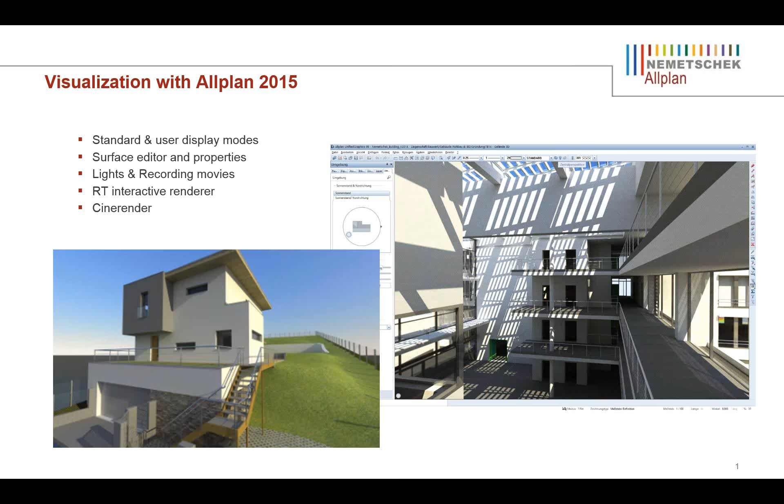Okay, so I'll switch to Allplan now.

So first, I would like to start with the new unified windows. What does this unified working window mean?

It means in the previous version there was a special animation window which shows all the surfaces and animation properties, and a construction mode where the user can draw and so on.

So in 2015 we unified this behavior and introduced a new unified window where all the display could be used using the new display modes.

These display modes you will find in the navigation toolbar, so any window can be switched between these various types. For example, from wireframe to animation, or to different types of display modes.

So there are a couple of standard default display modes which could be used, and then the user can adjust or create a new one as a quicker way to display the model or a scene.

So maybe, as you know, this is the classic wireframe mode, which is mainly used in the floor plan.

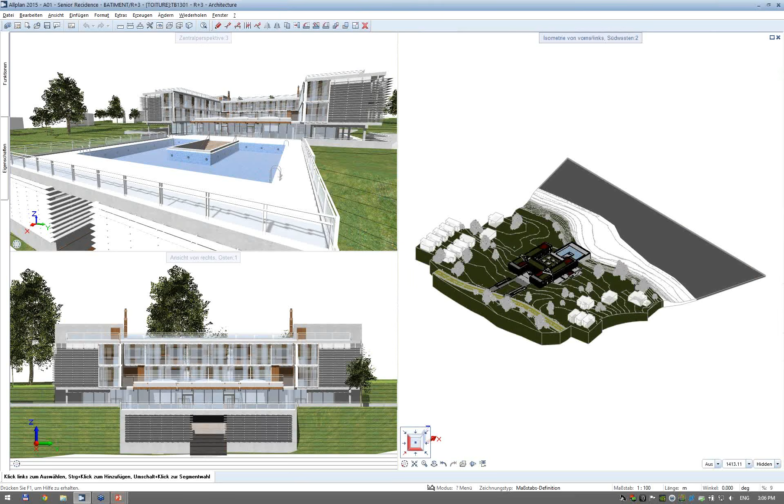I go to a different mode, and then if I want, I can use this pencil to modify this display mode.

For example, I can choose here if I want to show the transparency, or the surfaces, or some other properties.

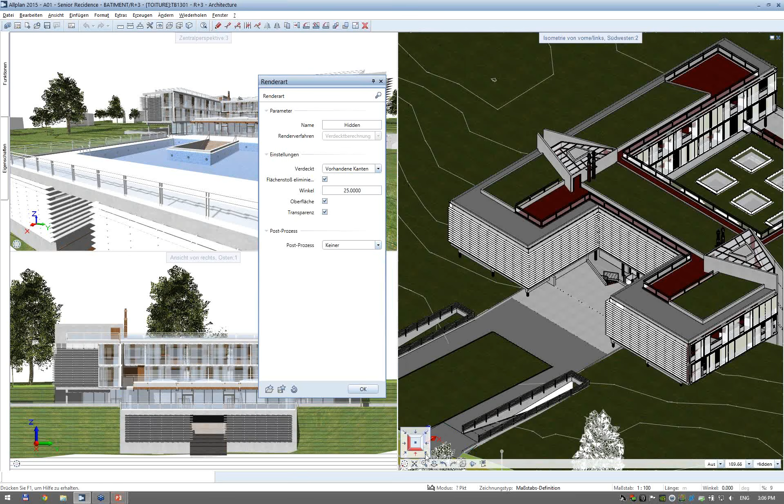For example, I can apply some filter like a sepia effect or black and white to get some kind of appearance of the model.

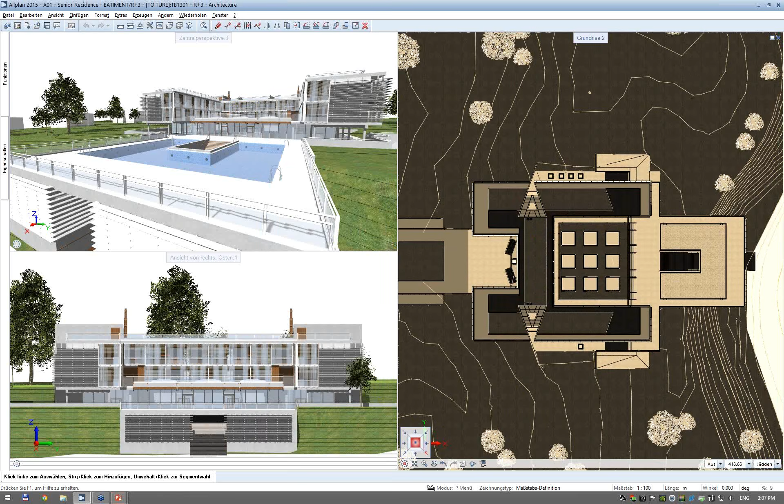To get the hand drawing style of the model, we can use the sketch mode.

And then if you want, you can adjust this mode to get the feeling which you want to achieve.

Again, you can apply the surfaces or use different styles like pencil, pen, marker, and so on. So it depends on your wish how you want to display this data.

If I want, I can display this mode in any window, and the used line type will be used in all windows when the sketch is open.

I can adjust the thickness of the lines. This is a thickness in pixels.

So then I get more smooth details, or more detail if I want.

All these new modes are hardware accelerated, so it's very fast in real time. But of course, it depends on how much data is used.

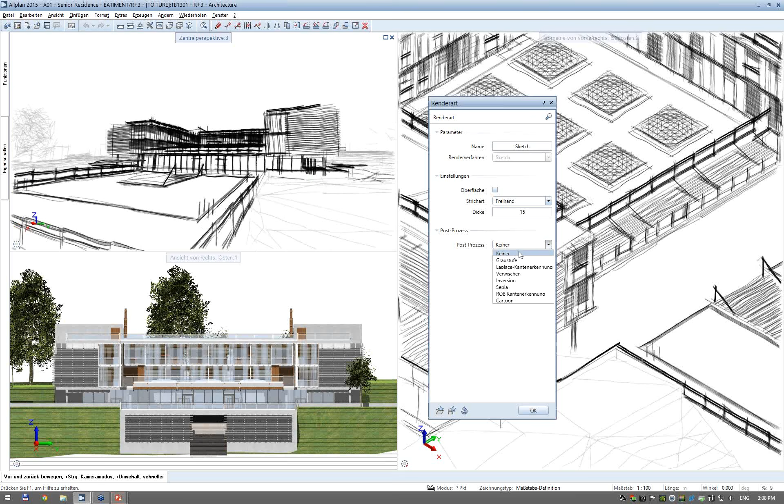If I want, I can also apply any kind of post-process to this. I can show you some different appearances of the sketch mode. For example, I can use the inverted post-process to have a different appearance of the model.

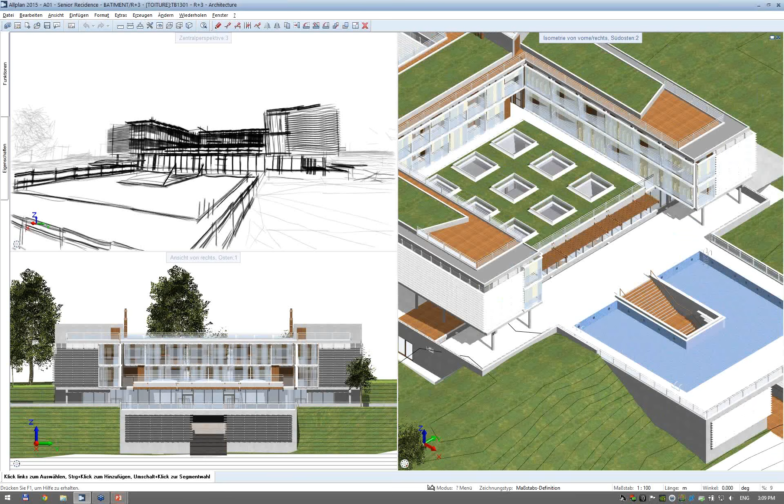Okay, I will go back to animation. If you can see here, with 2015 we introduced a new enhanced animation display mode, which means we can now show in real time the shadows, the real-time reflections on reflective objects, and real-time transparency, which is real transparency, not only a simulation of it. So if you have transparent objects and look through one to another object, they are affected by the color of the transparent objects in front. So this is real transparency, real reflections.

Again, because sometimes users want different settings to show the model, the animation can be adjusted, so you can choose the quality of the animation. For example, Phong is the new animation with all the enhanced settings like reflection, shadows, and everything. If you use Gouraud, this is more or less like the animation in 2014, so it's quicker because the most powerful properties aren't there. So it's quicker, faster, but not as realistic as Phong. But for bigger models, or if you want a simpler appearance of the model, you can use this Gouraud shading.

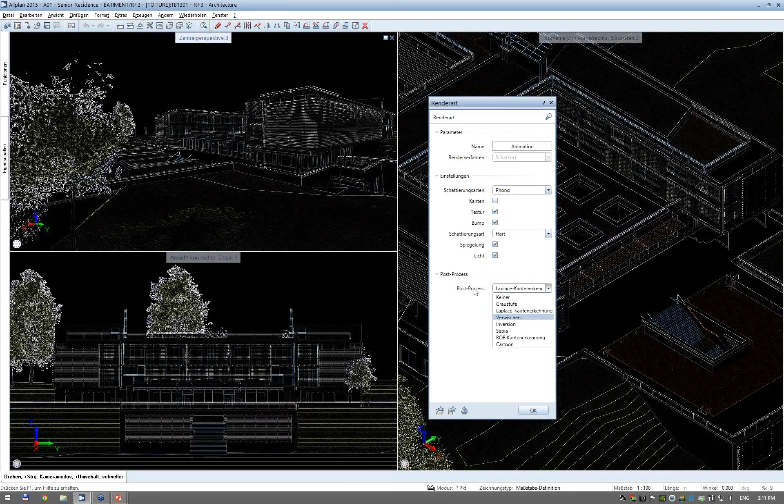Of course, you can turn off the textures, or as I told you, there's not only reflection but also bump, the deformation of surfaces, directly in the animation window. I can switch off the lights if there are any, or turn off the reflections. I can apply any kind of post process to this if I want, some kind of Laplace, or some blurriness, or other effects. There's also a possibility to use soft shadows.

So I prepared the new user-defined display mode. You can see here the shadows are soft, no hard shadows with strict silhouettes. But of course these soft shadows need more processing power. If you want, you can adjust the blurriness of these shadows here for the mode with soft shadows.

And this is, for example, the animation with lower quality. With the bigger model, or if you want less realistic results, it's quicker, faster with the movement, and of course you can combine these kinds of user modes.

I would like to show you how to create them. You can create a new mode very easily, name it, and then simply choose which mode you want to use. For example, sketch in as a marker with this kind of thickness without any post-process. Then it appears here, and I can use it and display the model in it. If you want to delete them, in the user display mode you can find this delete button, so you can automatically delete these user modes.

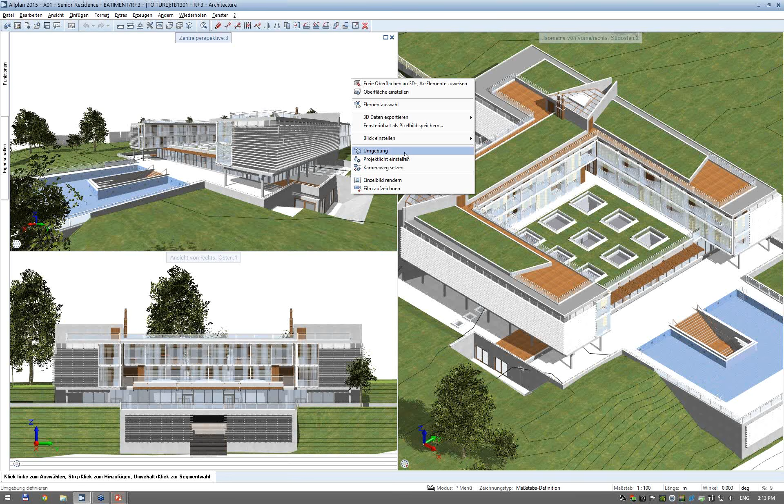I'd like to go back to the animation and show you the appearance of the model using different backgrounds, because what we can see here now is just the white color background. So the newly introduced features are everything connected with the environment of the project.

So maybe I would like to first switch to the physical sky. I will use the full screen mode. So we have the new possibility to locate the project. We can use the map or the location finder, so I can simply type the location or the street and locate the project automatically, or use the map to locate the project.

We also introduced the new possibility to locate the project with more precision, and we can use time zones if we're working on an international project. So working in Germany, for example, and locating the project somewhere else on the globe.

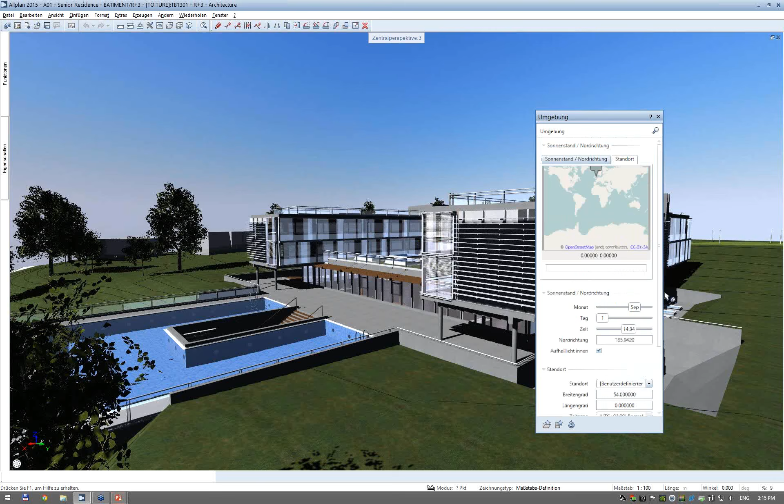So to be able to set the correct orientation, we can use the active graphics or the north orientation. We can grab the symbol and simply locate the north.

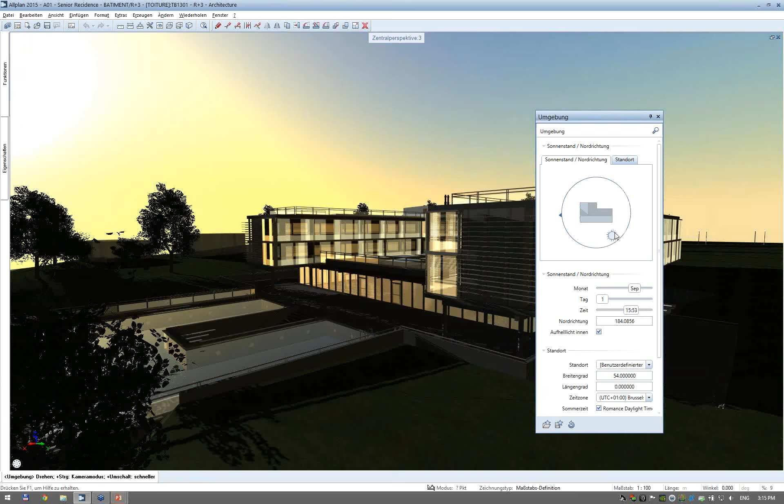If you want to show how the project will look at sunrise or sunset or during the day, we can use the horizontal slider here, or just grab the sun here, and you will see how it will look in the evening or during the night, with all the shadows and the appearance of the project updating automatically. So this is, for example, somewhere in the morning. This is a real physical sky, and of course it depends on the date, so specifically it's a shorter day during the winter and so on.

Maybe I would like to show you the new virtual ground plane, which can be used to simulate some real simple ground. But this project has the digital model terrain, so I prefer not to use this function.

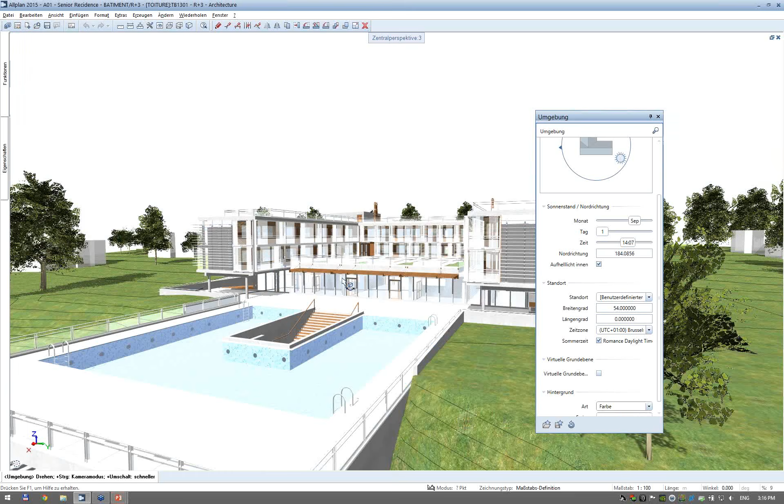As before, there was the possibility to use a color as the background. I can use different colors if I want, defining the color in the new palette, and use it not only for the background but this color also affects the scene, so the lighting of the scene.

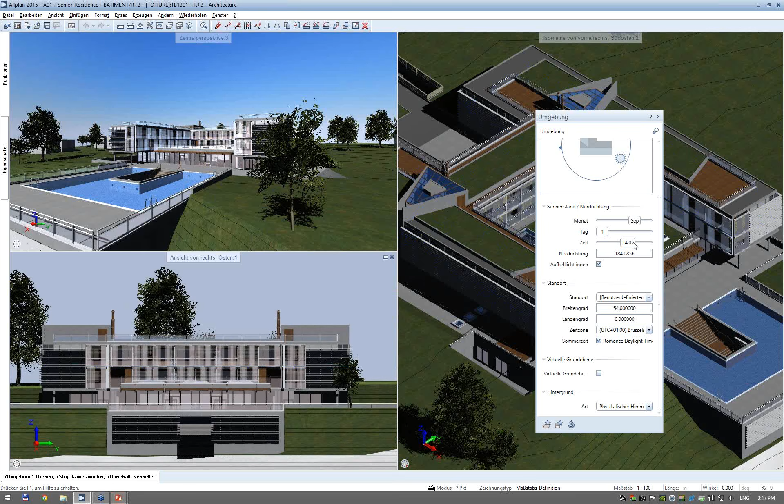Maybe I will switch back to the animation. If I'm using the animation in multiple windows, you can see the appearance in all of these windows. For example, if I use the evening setting, you can see the evening in all of the animation windows, using these kinds of properties.

Then there is a third possibility to use the background, and this is the possibility to load a bitmap in the background. Of course it could be a simple JPEG or any other bitmap, a simple photo, and I can use this photo as a background, or it could be a HDR map, a high dynamic range image, which is usually used for specific skies to simulate specific weather, like storm or cloudy weather and so on.

As a standard, if I use HDR pictures, you can use the 30 Year Edition skies in the office, the bureau, where you can find interesting HDR pictures which can be used.

These images are mapped as standard with spherical mapping. But planar mapping could also be used, and this is more or less for photos which you took in the field.

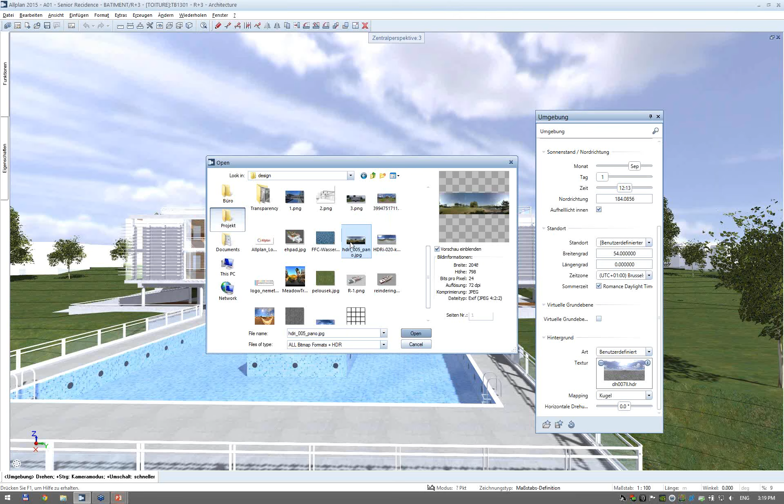I want to place the project into the photography. If I want to, I can use this button to use the browser, and use different, for example, 360 degree photographs.

For example, this is also the spherical mapping of the JPEG. The big difference between using classical JPEGs or bitmaps and HDR images is that if there is a sun in the HDR image, or a real place with real brightness, then this sun is taken from the image and used as the project sun. So in this case, the project properties like north orientation and so on will be ignored, and the sun from the sky will be used.

Okay, so I used this image again.

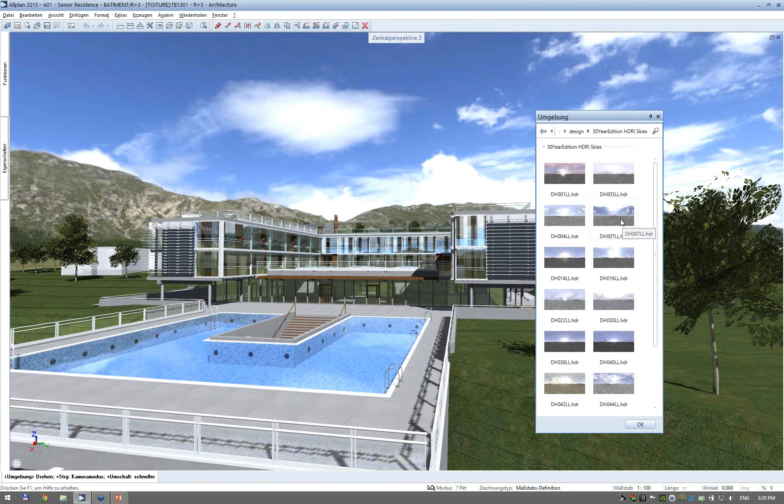If you want to rotate and get the sky into the right position, you can use this horizontal slider to locate the sky.

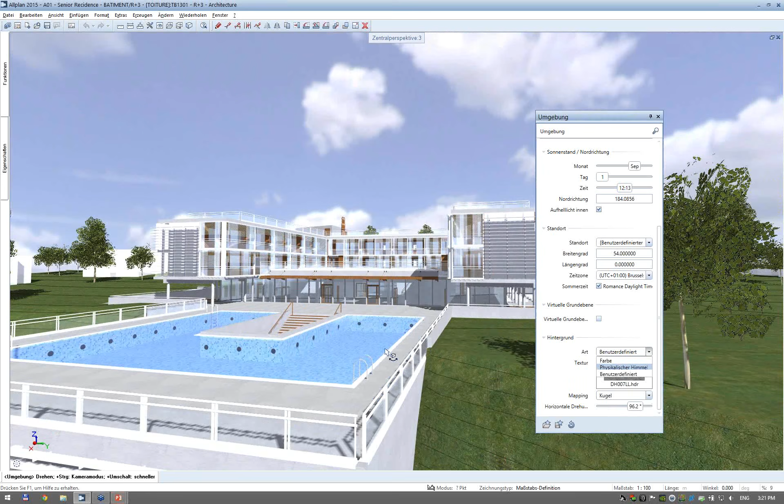Okay, I will use the physical sky again. As you can see here in this mode, all reflective objects reflect what is in the background, so it depends on the image.

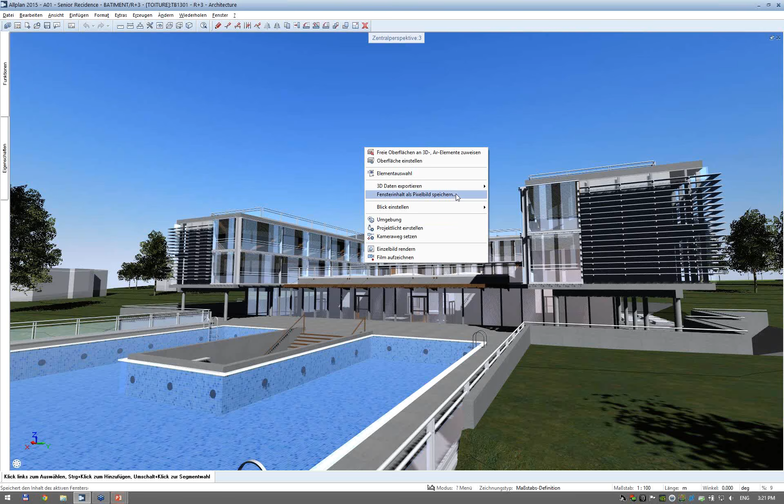Okay, I will leave the environment now. If you like the appearance of the animation window, you can directly save the image, save the screen to an image with specific resolution and use it in your plans, in your layouts. For example, I can use directly this resolution taken from the screen and save it somewhere and use it.

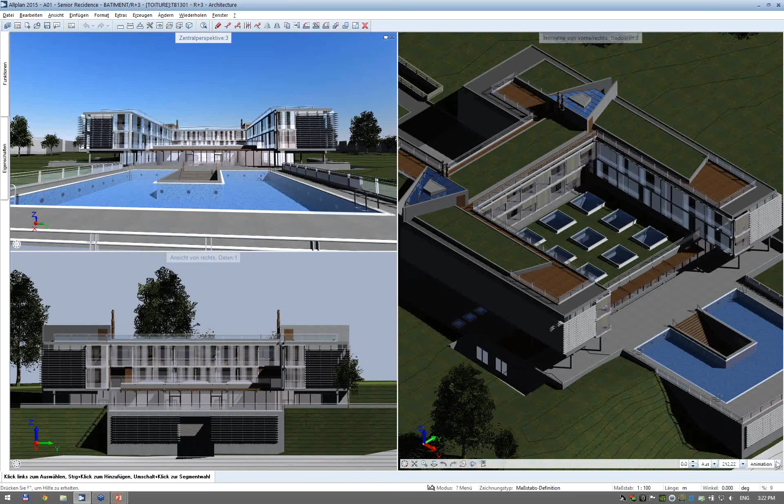So without any rendering, I can simply save these images very quickly. Of course, for those who use the save content function, there is a shortcut to call this function, or you can use the function Fensterinhalt in die Ablage (window content to clipboard), and then using Ctrl+V you can place it in the plan or in your drawing file. So it's also very easy to get this animation appearance directly to your files.

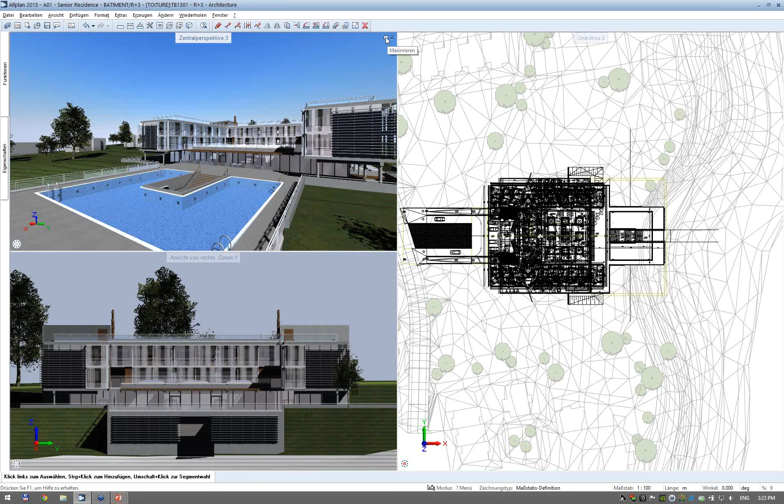Okay, before we go back to or proceed to the renderings and some others, I would like to show you first maybe slightly some adjustments also in the camera paths or in the definitions. So I will again use the navigation mode and the context menu and call the camera path settings. Now it's possible to define more than one camera path, there could be many of them in this palette.

So I can create a new one. You can set some settings like name, size of the symbols of the cameras, if I'm using perspective or isometry, and then...

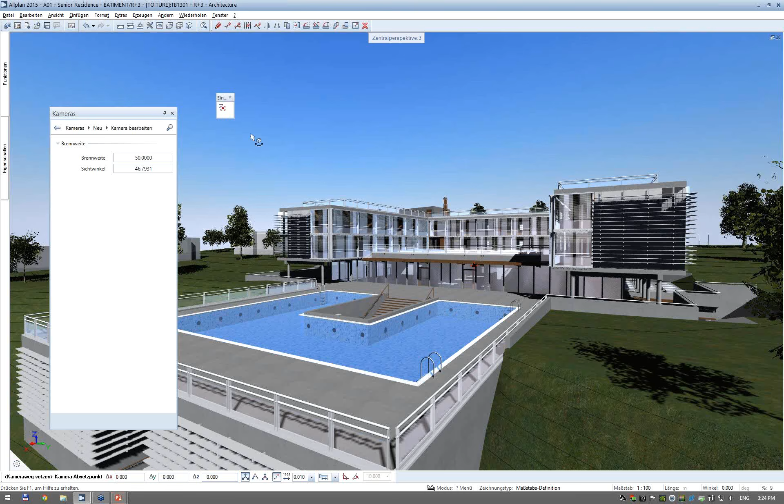I can stay in this full screen mode, and it's very easy to set the camera. Of course, if I want to, I can use the point definition to locate the camera specifically on some position and then the target point. But here I can define the camera view by overtaking the properties of this full screen window. So this is my camera, and I can overtake the properties.

So now I'm defining the second camera. I will place it here, and again overtake the properties of this active window. Again, the second or third camera. So this is always about: if you overtake the properties, this is the next camera, and you can change, for example, the visible angle or the focal length. So it's the next camera.

And if I leave the full screen mode, you can see this is my camera. I can place another camera by point clicking. So if this is all, I can press Escape to finish the camera path. And this is my camera path.

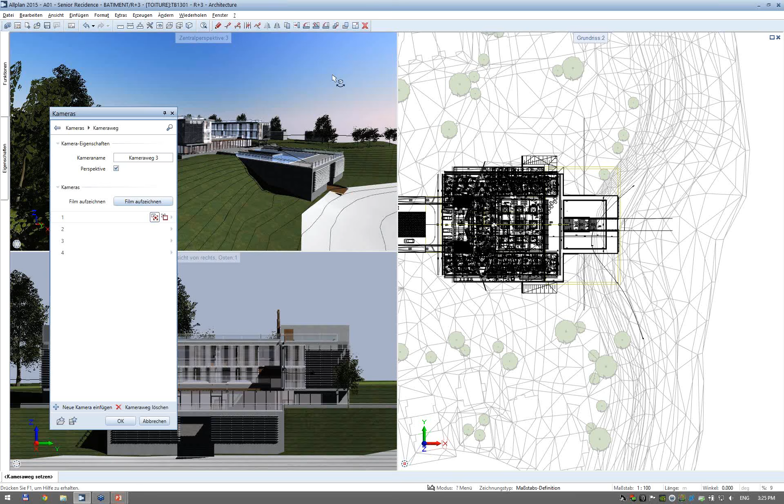So now it's very easy again that I go back to the full screen mode. And you can, of course, if you want to change the camera and look on the properties of specific camera 1, 2, 3, 4, you can click on it and you will see everything. So you can change the properties, or you can again overtake it or just show it.

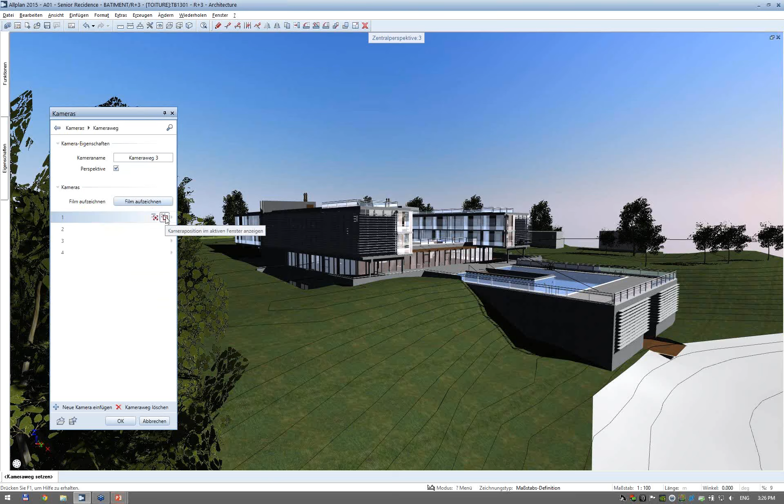But I would like to show you these things here. So for each camera, you can show this camera in the active window. So this is this button. This is the first camera, the second, third, fourth. Or if you want to change or define the new position, the best way is to show the camera first, then find another position, and then record it by clicking this second button.

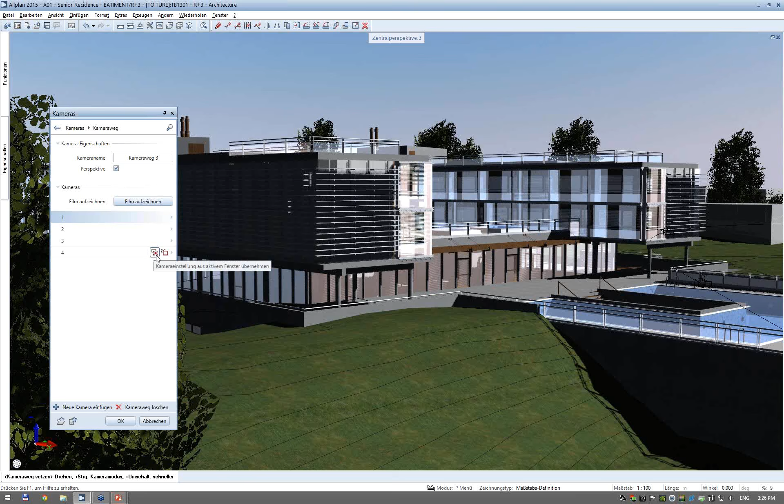So this is everything. So I have my camera path now. As you can see here, this is my camera path 3. And what can I do? I can directly go to recording the movie. So I can, without changing the function, go directly to the recording movie.

And I can record a movie without the rendering time, so without using the render, directly from the animation. So I can just specify the path, the compression, or the resolution, or I can just play the movie. So I can define the length and the frames per second, like in video cameras.

Okay, so I press it and just watch the movie. So there are all properties of the animation window, like shadows, the bumps, the reflections, and everything. And at the same time, you get the movie if you, of course, record it to the file.

Then another possibility is to directly call the recording in the movie, and we're introducing 4 new presets. So you can use the camera path recording and use the same property, or you can create sun studies by defining the properties like start time, end time, and so on. Again the times of the frame length and the frames per second, or just a simple rotation of the camera.

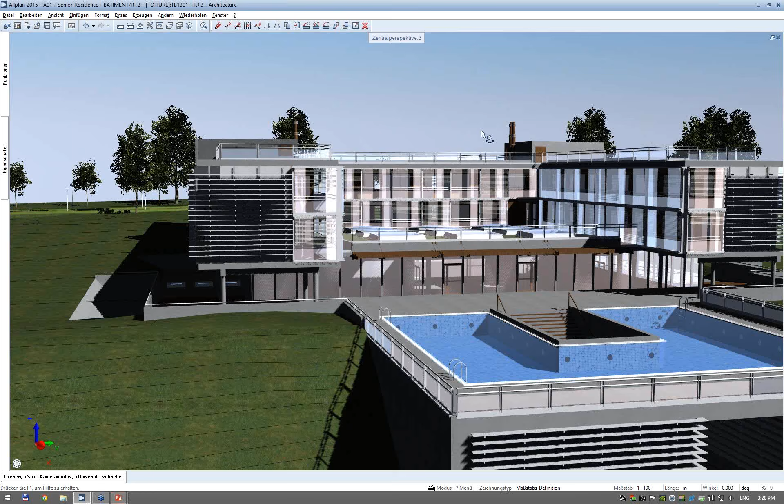Okay, one more thing for the camera paths. So when I go to the recording movie, we introduce the new timeline for the camera path. It means, for example, this camera path consists of 4 cameras, so we can specify the time between each camera if you want to. If you want quicker movement between the first and second camera, you can set, for example, 8 seconds.

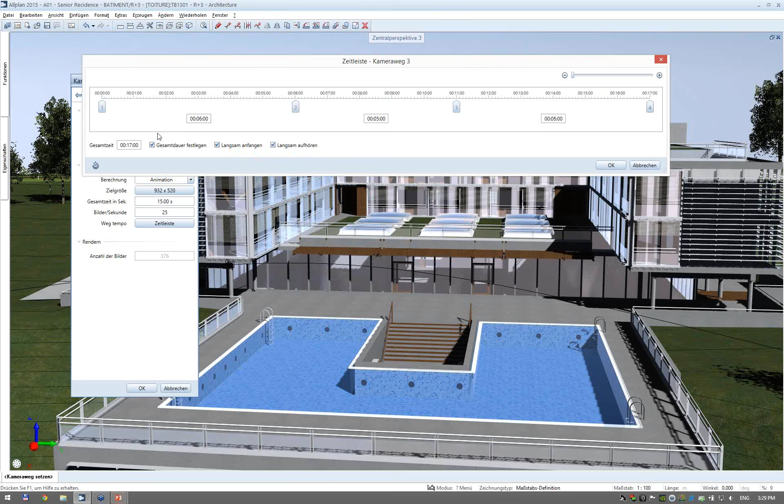And then it depends if you fix the time — the total time can be stretched, or you just fix and stretch the time between the existing cameras. If you want to slowly start movement from 0 to the specific speed, you can have a smooth start and smooth end, so the camera velocity will be different at the beginning and at the end. So we will smoothly start, then get to the specific speed, and then again at the end slow the camera down.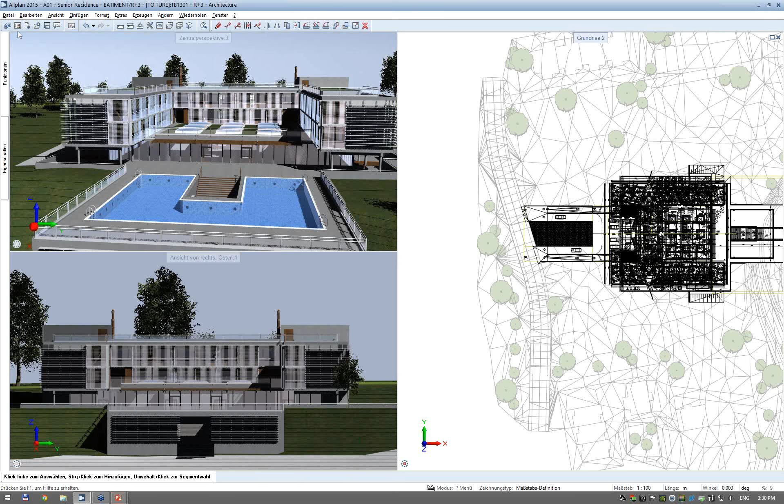Okay, so then I would like to go, and we can look at the new surface properties. So I will load a different project now.

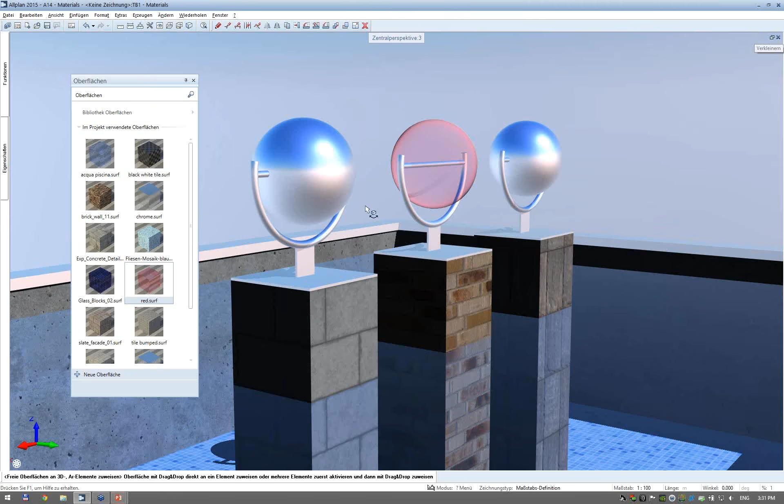But this is, of course, right now limited to the architectural functions or the 3D elements, not for the rooms. What you see here in this list is the used surfaces - surfaces which are really used in the project, not only those that lie in the project folder, but really assigned on some specific element. So what I can do is grab an existing surface and assign it in the animation or navigation mode, or use any other mode or window to assign the element.

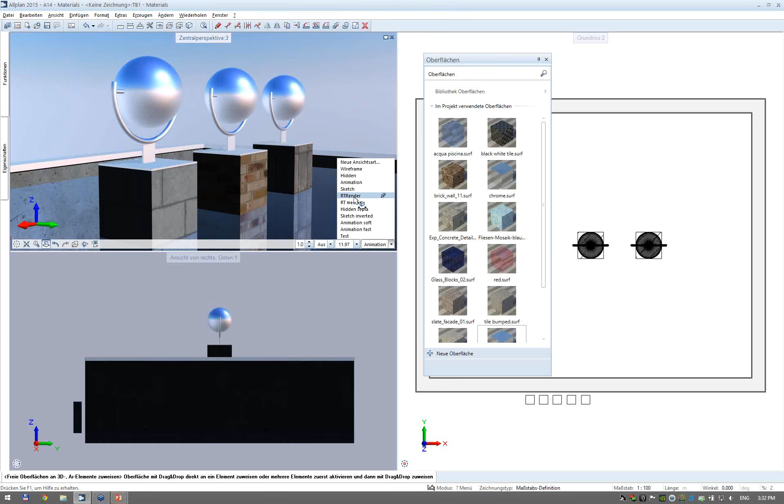To show you better the properties of the materials, I will start the real-time renderer. What does it mean? We introduce a new technology for the rendering, called the real-time interactive renderer, which is a special type of rendering directly in the working window - a powerful interactive progressive render engine based on exact, unbiased, physically correct simulation of light behavior. So this is not a classical renderer, but a physically based light simulator. It is a progressive renderer, meaning it's based on the Monte Carlo integration methods.

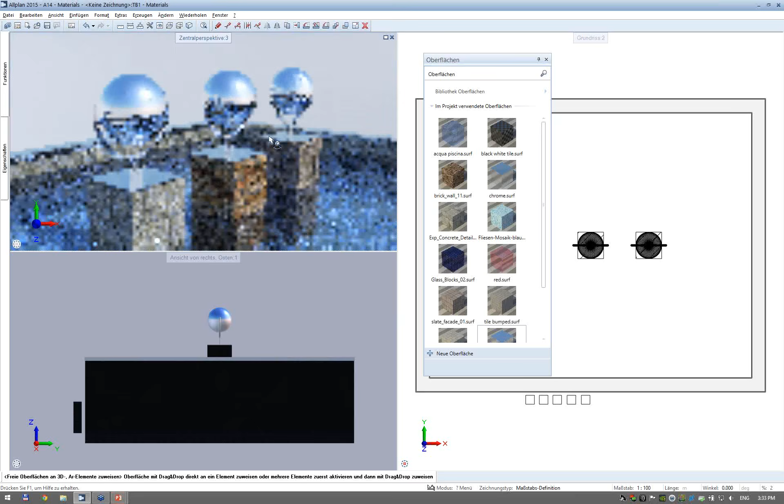This means the rendering is noisy at the beginning, and it iterates step by step to the final solution without any noise or fragments. Of course, it depends on the light conditions how fast the noise is reduced. We call it real-time because you can navigate in real time in the scene. It doesn't mean you get the final rendering right away, but it's computing in real time, and you can navigate and change the properties of the scene - for example, as I showed you before, the appearance.

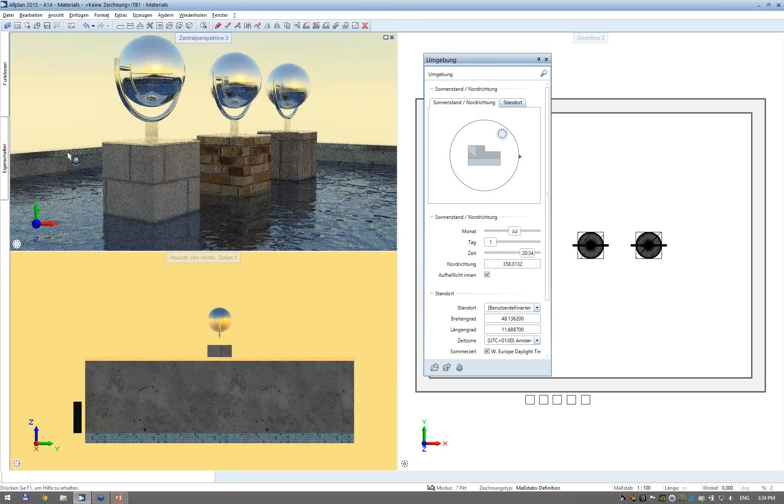Okay, I would like to look at some specific properties. For example, as you can see here in these spheres, there are reflective elements, so I will look at this and modify it. What we have here is a real-time rendered preview. We can use different mapping to look at the surface. Just a small hint: when the surface editor is open, the real-time interactive renderer is stopped.

So there are new properties of the materials, like color or using texture. For example, here we're using white color, and as you can see, we introduce a new bump channel to simulate the deformation of the surface. So I load the bump map - as you can see, the white areas have different heights, and the black areas have zero height. You can increase this effect using positive or negative values if you want to reverse it, and bigger values mean a bigger effect of this bump channel intensity.

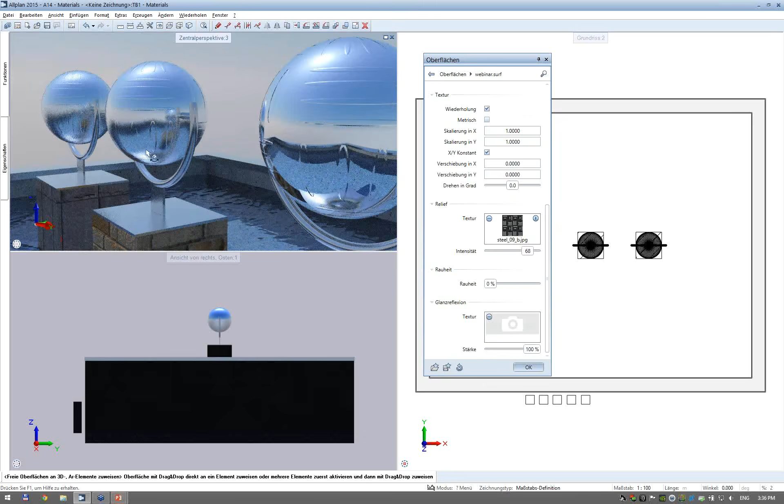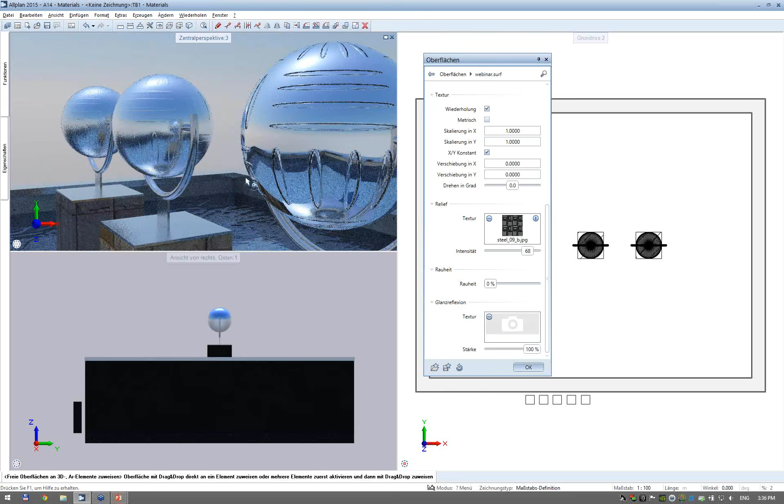This surface is more or less like chrome or mirror, because physically it's a glossy surface. This is the new roughness channel, which means if the roughness is 0, then it's like a mirror or chrome without any blurriness - a real smooth surface. If you want to achieve something like milk glass or other metals, then the roughness channel is set to a different value, for example 28%. So roughness is the microscopical behavior of the surface - a microscopical surface consists of a lot of small surfaces which reflect the light in different directions, therefore it creates this blurry effect.

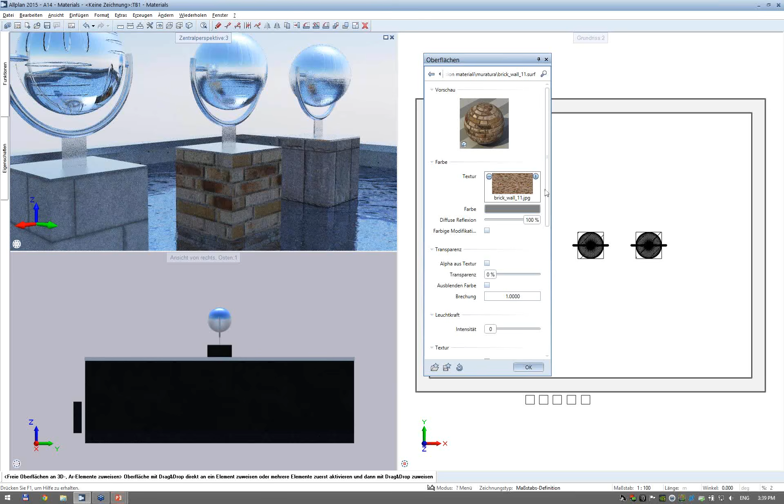Okay, we can have a look at the different properties. For example, I created this kind of surface to simulate some effects for you.

I open the properties of this material. As you can see here, I loaded the reflection map. I loaded a texture which consists of black and white areas, and this means I can define which areas will be reflective and which will not. The black color means there are areas with no reflection, and the white areas mean full reflection, and full in this case means 70%. So as you can see, there are non-reflective parts and reflective parts which reflect the physical sky.

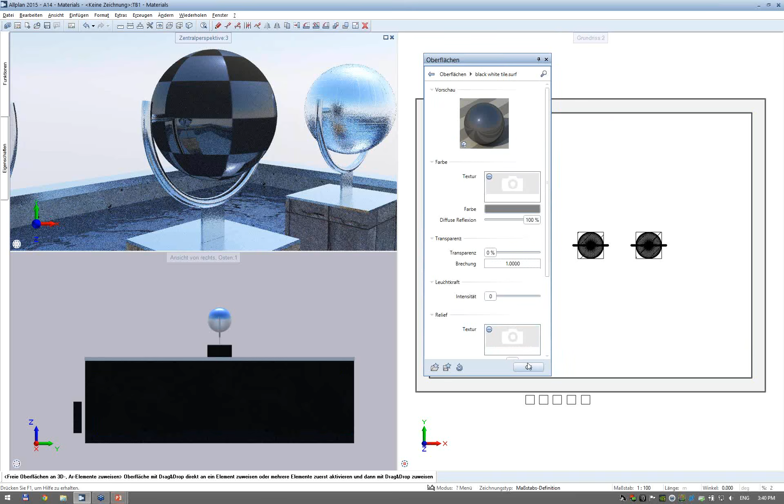If I switch this, then all parts of the material will be reflective, and 70% of the upcoming light will be reflected by the surface.

Okay, we can have a look briefly at some kind of glass. So I will use the default edition materials glass, for example, with 90% transparency.

If I open the simple glass, this is the correctly defined surface properties. It means the white color with 90% transparency, so 90% of the upcoming light goes through with a refraction index, and then the rest of the light, the 10% which does not go through, is reflected by the surface.

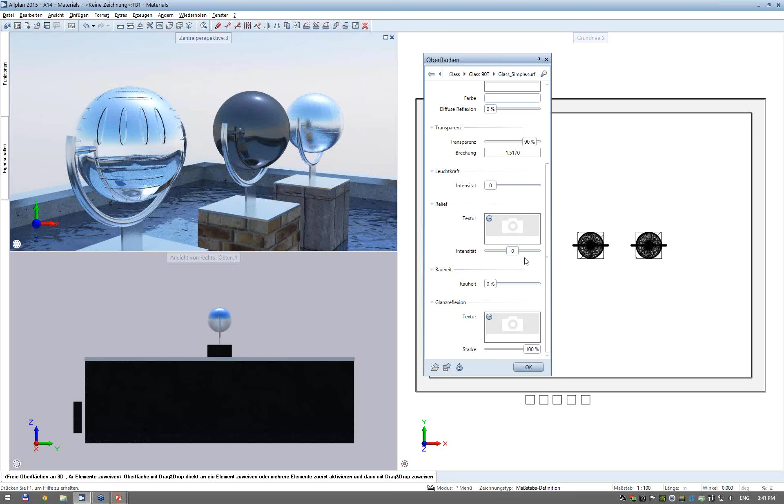Okay, I would like to show you one more of the surface properties, which is a special luminosity surface or property.

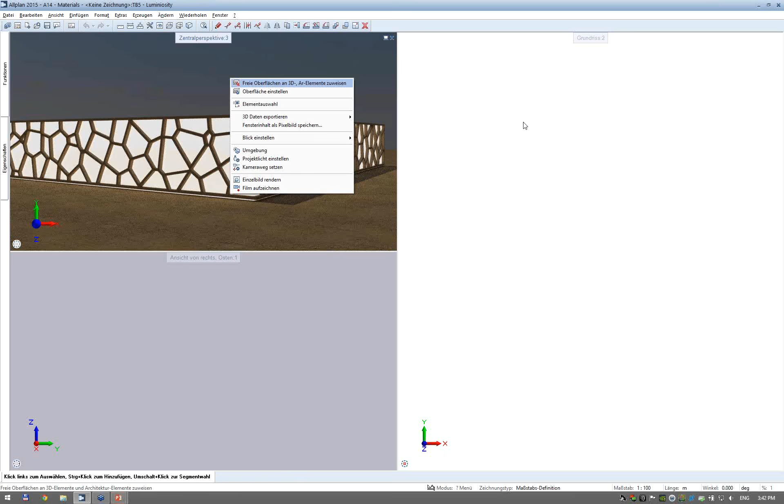I call the real-time renderer for it, and we go to the properties, and this is it. So we have the new property luminosity, which is the property that makes the surface glow somehow, and this is the value for it. You can define more than 100% to create design effects, for example neon lights, or you can imitate light without creating a light. So it can be used for objects like lamps or so.

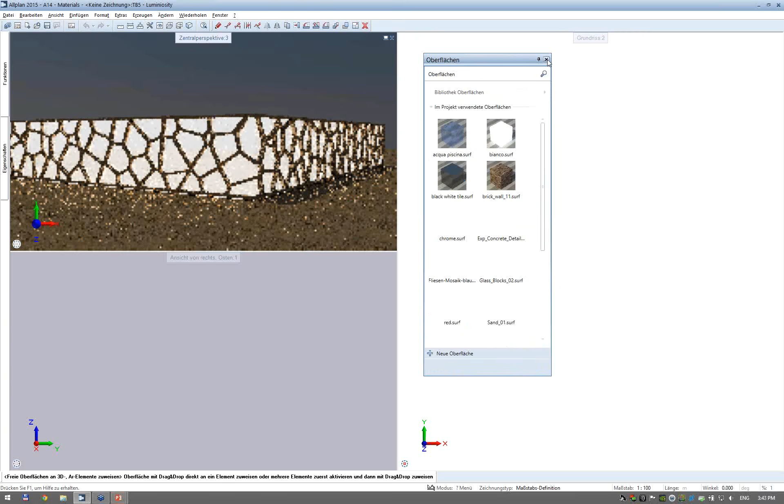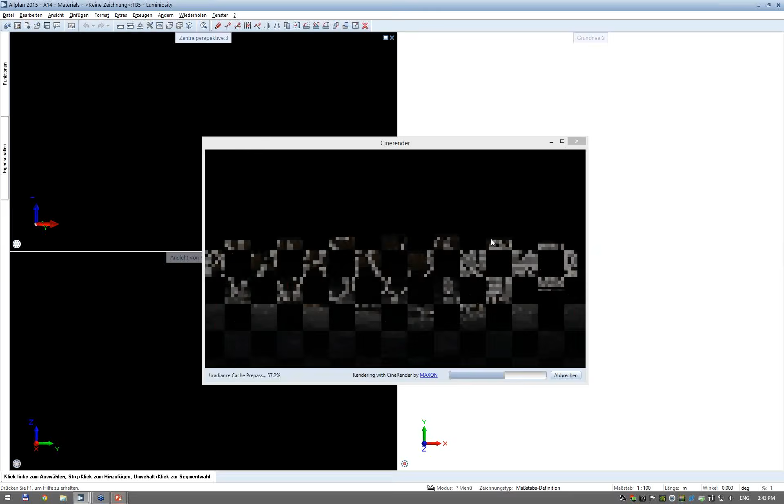Okay, I can change the night time and call the CineRender for it. So I press F2, and I will speak about the CineRender later. I just press render, so you can see the glowing of the object in the renderer.

Maybe I'll use this again. I will switch back to the different project and show you a couple more properties.

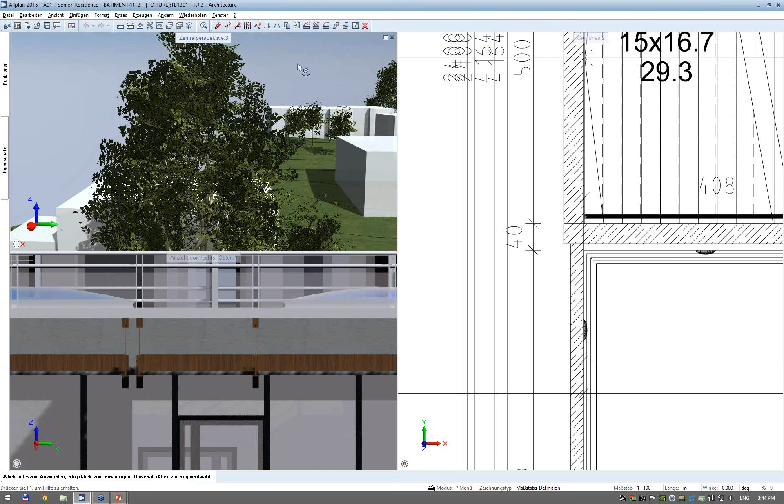So have a closer look at this kind of surface, like leaves on the tree. Now you can use the new surface properties, and this is not only blending some kind of color. When I use a bitmap as a texture, in older Allplan versions there was a possibility to turn off the black pixel. Now you can blend any kind of color, and you can use tolerance, so not only a specific RGB color, but also with some kind of tolerance with this intensity of the color.

If the texture is like TIFF or PNG format, you can use automatically alpha from texture. Some specific formats have the alpha channel directly in the specific layer, and in this case these areas which should not be visible are automatically hidden without the switching of the blending color.

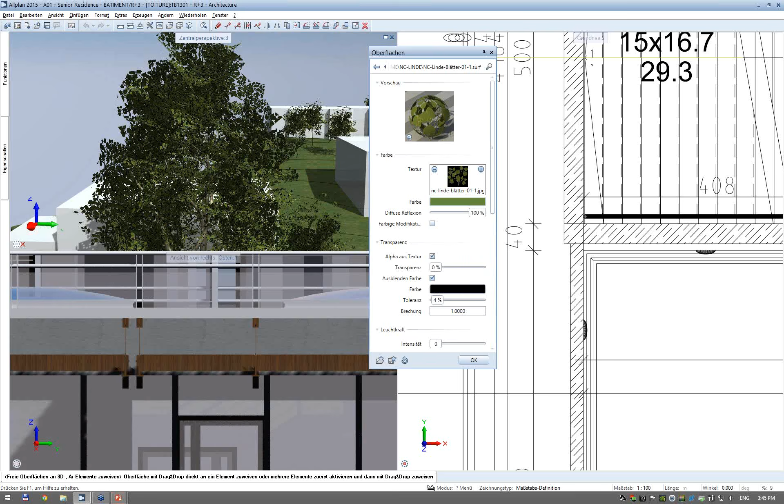So I can say something about the integrated Cinema 4D renderer. When your model is ready, you have your specific view. You can call the F2 function for rendering, or use the context menu to create the rendering, and there are a couple of settings here.

You can use presets to set the resolution, or if you have some specific palette, you can use it to overtake the properties, or simply select your own resolution, name it, and it will automatically be stored in your list for later use in your presets. This is very useful to have your own presets.

Right now, to speed up the rendering, I use this resolution from the active window. There are two ways to use the render mode with the Cinema Renderer: Irradiance Cache, and Irradiance Cache plus Quasi Monte Carlo. The Irradiance Cache is more for interiors, and this could be used for outdoor scenes when the secondary method of calculating global illumination is used.

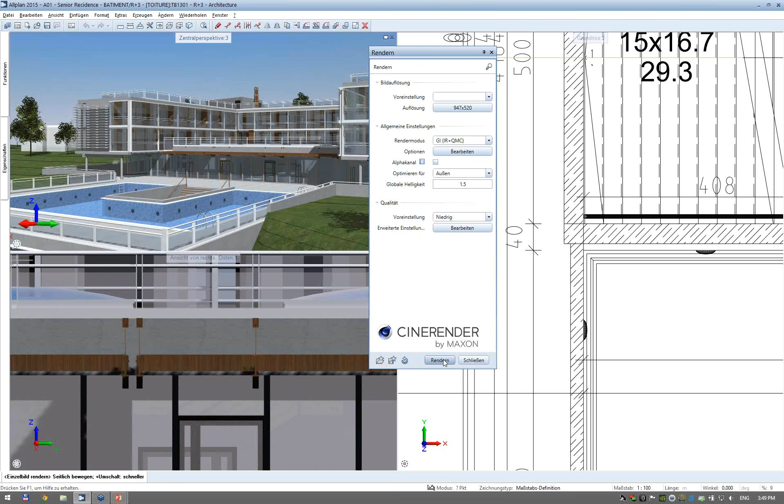So the rendering will initialize the scene and then start rendering. What is good here is that the Cinema Renderer runs in the background, so you can minimize the rendering window and start doing something else. For example, you can switch projects, load different drawing files, draw something, and when the rendering is finished, you'll be notified by the blinking of this independent window.

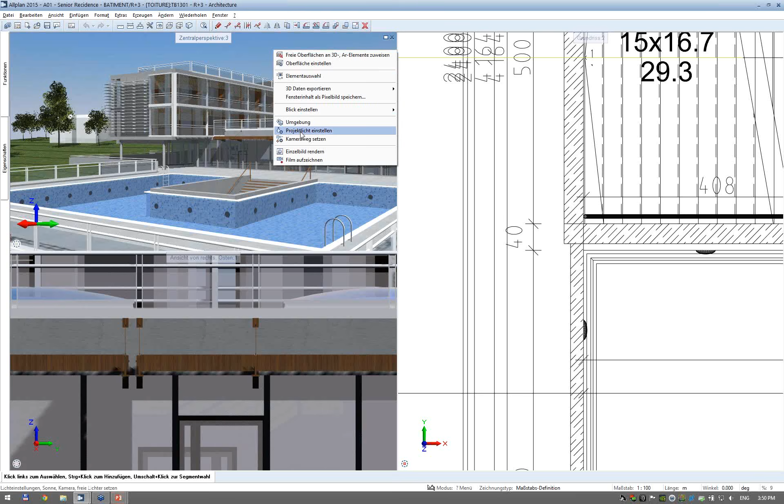Before the rendering is finished, I'd like to show you some more things about lights. There are two types of lights: project lights and document lights. Project light is stored in the project, and no matter which drawing file you are in, the project lights will always be there.

Sorry, the rendering is not finished yet. Or yeah, it's finished. So when the rendering is finished, I can adjust the picture a little bit if I want, do some specific color saturation, and then just save the picture to the drive.

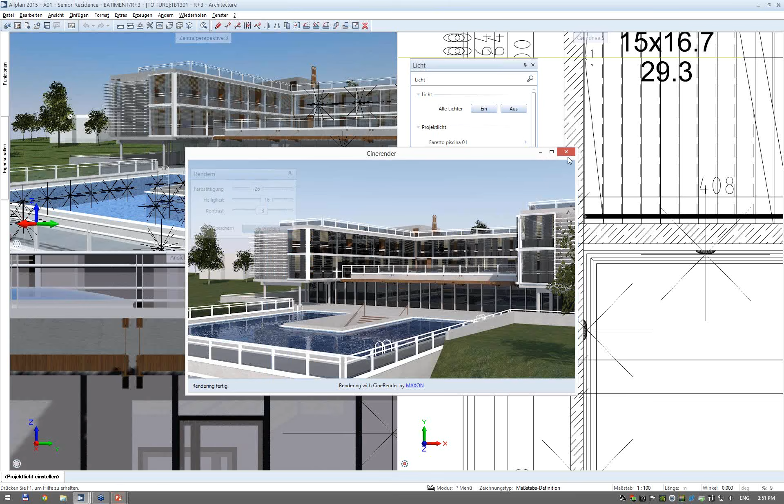For example, there are a lot of omni lights or point lights which are created in the project, so I can turn them on automatically, since all of them are stored here. So I can switch it on. And if I change the environment to night, I can create a night rendering, for example.

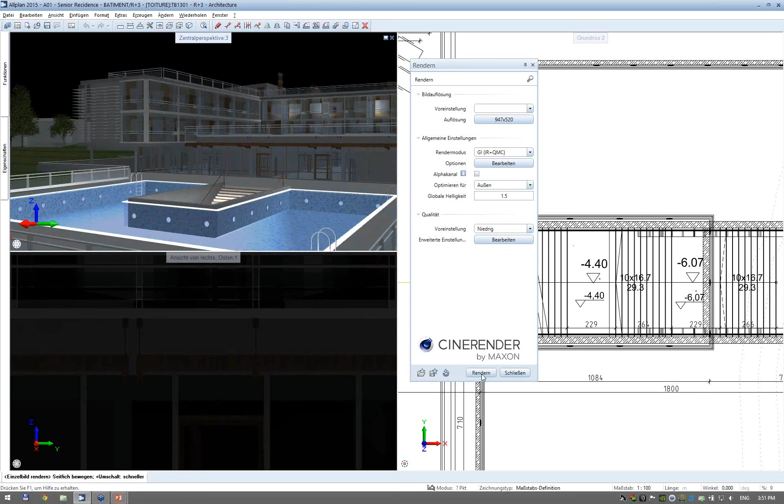Okay, I will go back with these settings. You can manage your lights in any kind of view, so you can set a multiple modification of specific lights here, and these two lights will be modified—for example, the intensity or the color of the light, or turning on the shadows or light status. So you can turn off these specific lights from the drawing file.

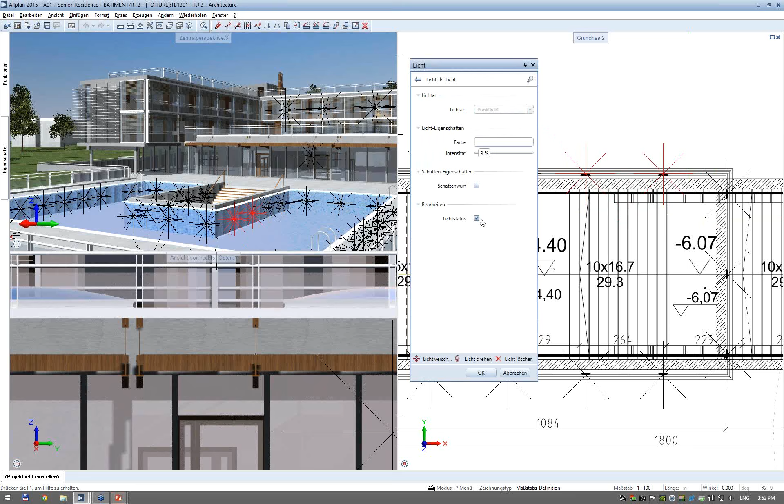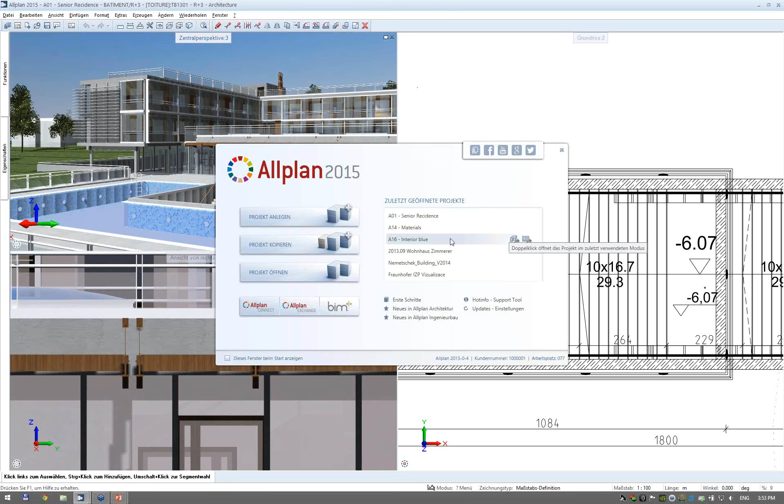Okay, now I will switch the project again. I would like to show you some tips for interior scenes. So I load some view—for example, I have a very simple interior here. I can load the lights I'm using in my scene, and there are three types here in my scene.

If you are lighting the interior, to get brighter results for the renderings, you need to simulate or use the so-called area light, or Fläche light. Usually it's placed behind the window from the interior side, to simulate the light coming from outside into the interior. I'm using the same dimensions as the window, place it there, and I can choose the intensity, the color, or name it.

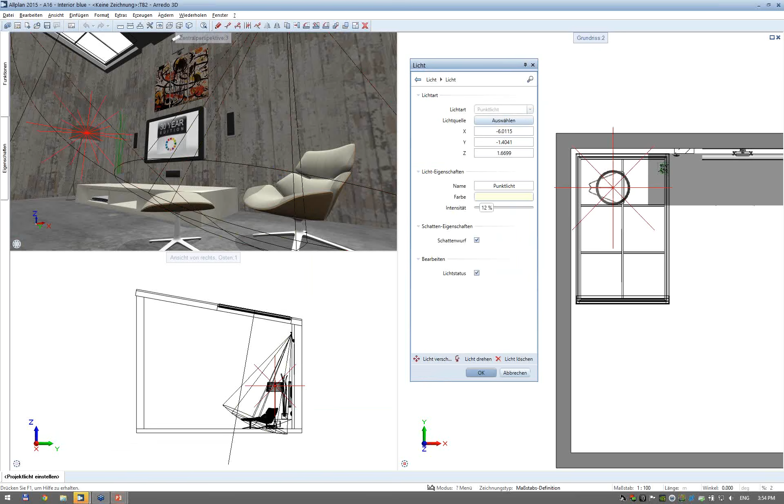Here it's important to use shadows for this kind of light, and the others are very typical—this is the spotlight or the point light for this kind of floor lamp.

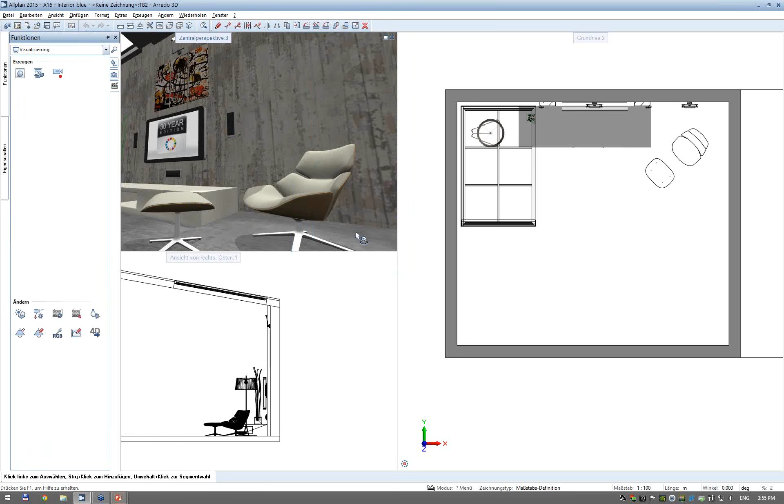Okay, so I have here my interior scene, using this camera view. If you look here, I can call up the assignment of the surfaces, and I have a special surface here—this is the TV screen. I can use this nice luminosity effect, so the TV screen itself will create some glow effect.

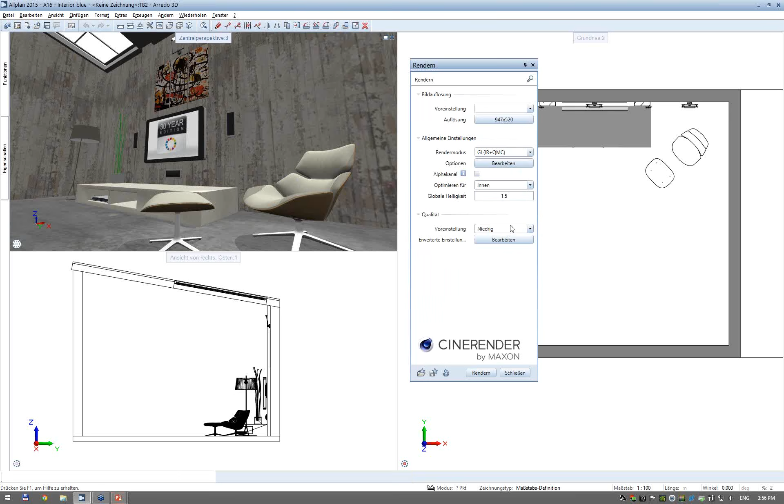Okay, so then when I render the scene, I can use low quality, for example. It will take some time.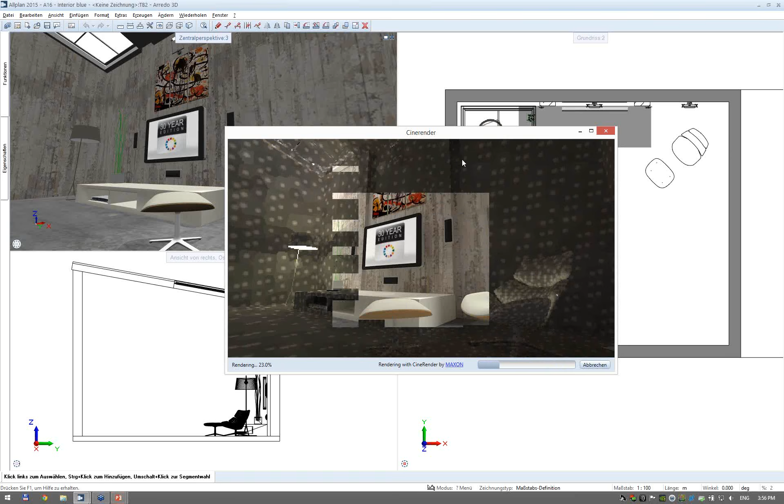Without the area light, the scene will not be so bright. So this is the only way, or the regular way, how to get light inside of the interior. This depends on your settings.

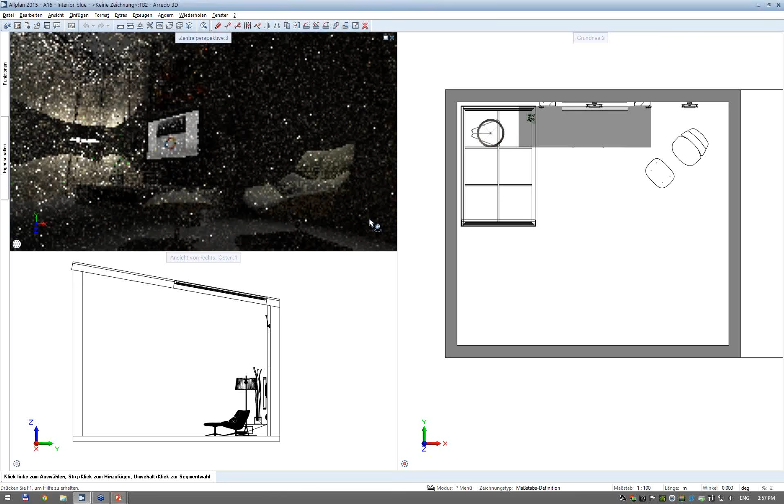I can show you some differences when I'm using the real-time renderer. There are differences in how the calculation is being processed. When I use the options for the real-time renderer, there are two auto exposure methods used.

If you want to get a brighter scene, since we're using the auto exposure methods, you can use the median method. Then the differences between the dark and bright areas are not so significant, as with the mean method or middle methods.

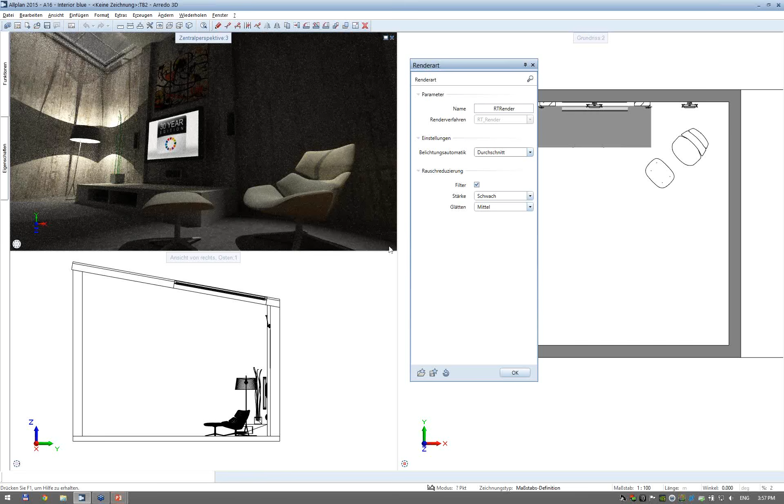This is more or less to get a specific feeling of the rendering, for example a sunset scene in the exterior or interior, for that kind of mood. With the median, it will not be so different between the dark and brighter areas in the rendering.

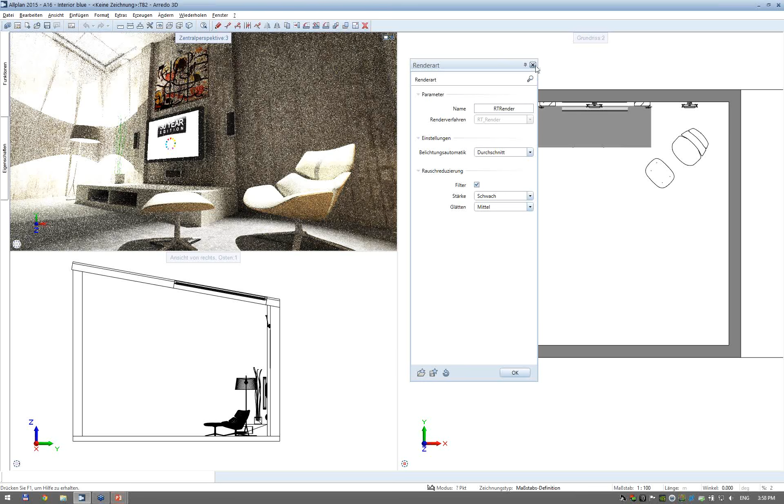Using the real-time interactive renderer, because of the light conditions, which can be really difficult, this may be a little slower than using the CineRender. But it's more precise since this is physical rendering, and if you have more time, you will get more realistic results.

One more thing: if you want to save the rendering while it's proceeding, you can anytime use the context menu and save picture as. This is the same as in different display modes.

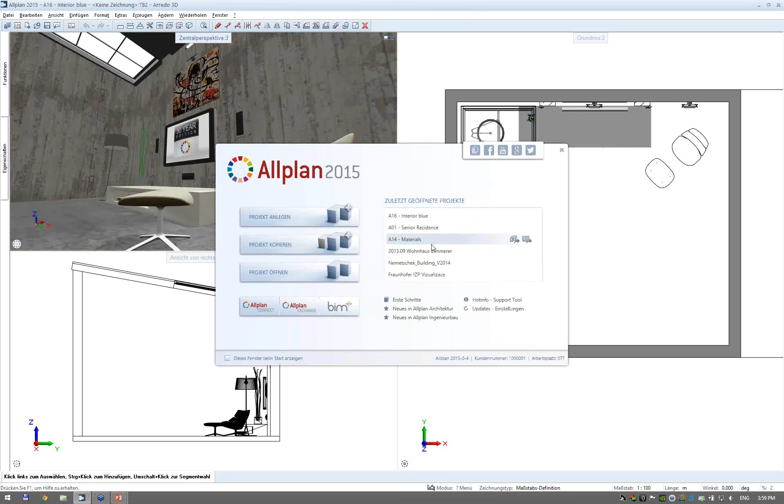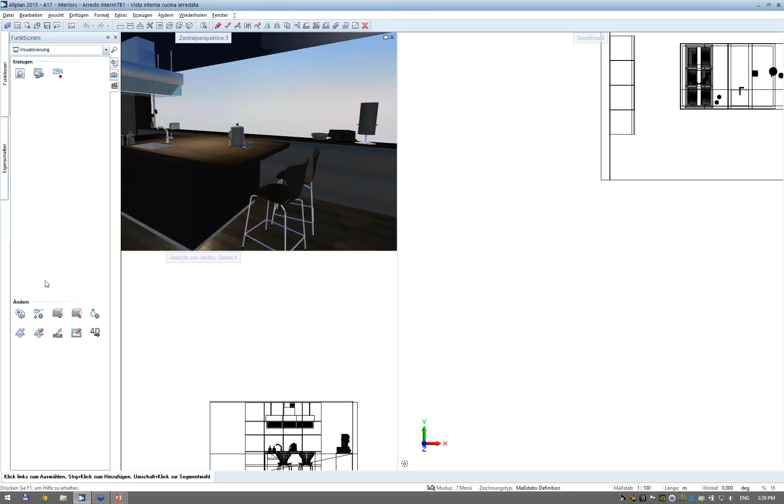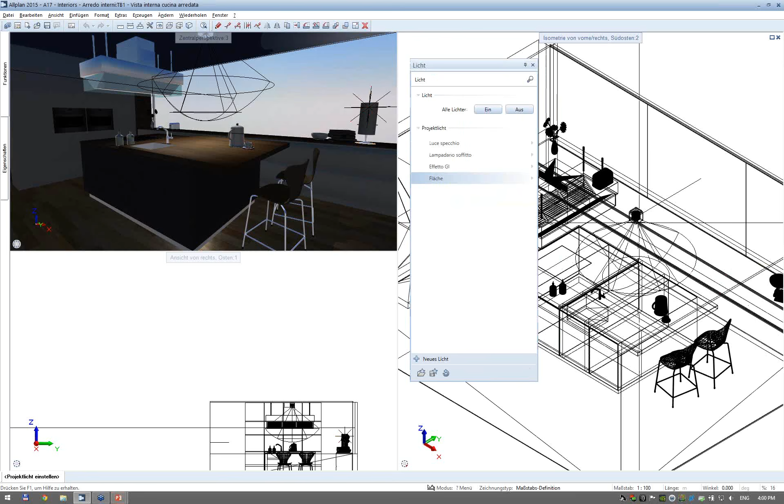Okay, maybe I will show you a different example. Again I will have a couple of lights here, and one of the lights is the area light, which covers the entire area of the window. And I have some supporting lights, like a point light in this lamp, or a spotlight on the ceiling lamp, and so on.

I will call the renderer again. And while the rendering is processing, you can call the render palette, and I would like to say something about the advanced properties of the material. If you look here, we have anti-aliasing, which means the edges of objects could be smoother if you use higher values.

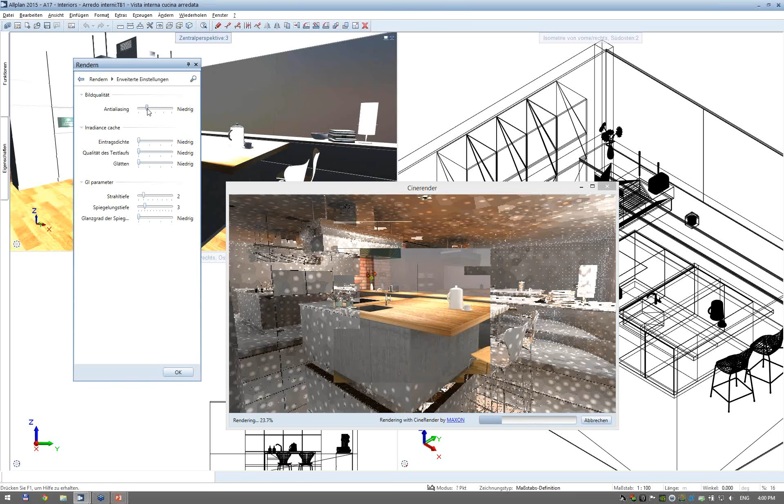So the pixel will be divided into subpixels to have smoother edges. Then we have density, which means how many samples are used for the calculation. This depends on the scene or on the light conditions.

If you are in the interior, you probably will need more samples to get a nicer rendering. But in the exterior, it's not so significant if you have a lot of direct illumination. Then there's the quality of these samples.

This goes hand in hand with global illumination, especially in these difficult conditions. Smoothness means that if you do not need more details, or you want to reduce the artifacts created by global illumination, you can get blurrier details and reduce these artifacts.

And of course we have the number of diffuse reflections, which reflect for example from the light source 3 times when the light stops, and also a number of reflections for the reflection. This is the quality of the glossy materials, meaning using roughness different than 0% or 100%.

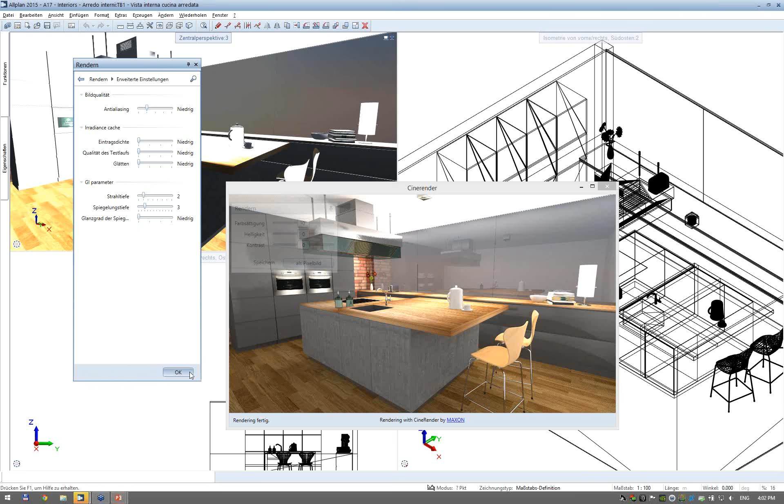So again, I can adapt the scene if I want to get some kind of appearance, and save it.

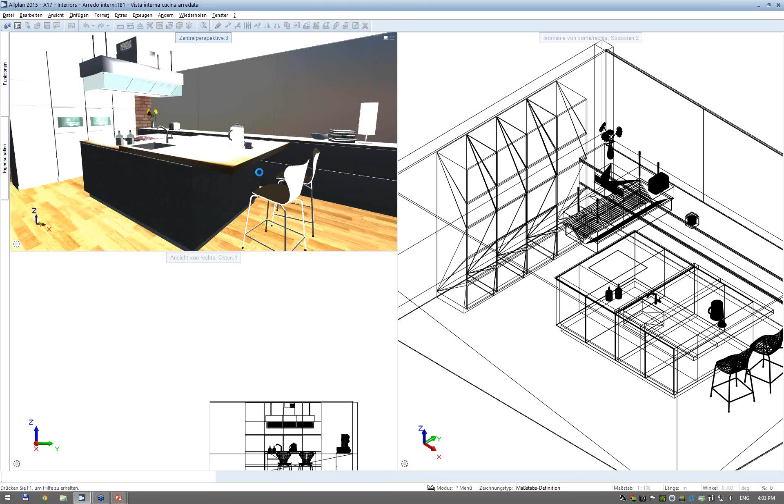I forgot to mention one important thing for the animation mode and also for the real-time renderer. If you want to achieve brighter results, you can use a new tool in the navigation toolbar, which is the adjustment of the exposure. You can get a darker or brighter image, depending on whether you are in the interior or exterior.

This is also important for the real-time renderer, because it uses auto exposure, similar to photo cameras. You can increase or decrease, or change the auto exposure value, to achieve a brighter or darker result.

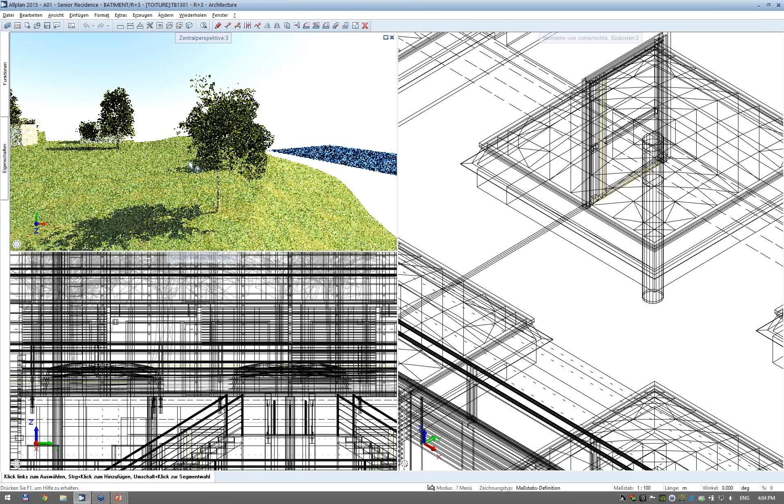This can also depend on the view and of course on some other properties.